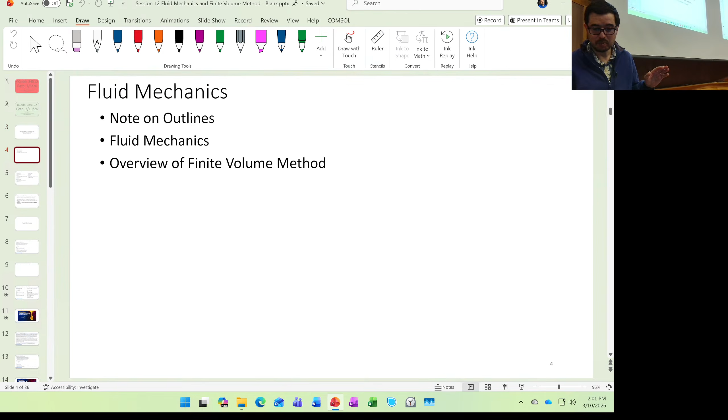So we'll talk a little bit about the projects, the outlines right now. At this point, most everybody is in a group of 3, and there are a few who seem to be looking for group members. I hope they are, I sent them a message today. There was one group of 2. If there are others I don't know about, please send me a message in the Canvas box. I went through the submissions for the pre-proposal and got some information, but I'm not getting all of it. So if you're having issues finding group members, just let me know.

After spring break, we'll have our next checkpoint for the final projects, due the Monday we get back, so I think that's the 23rd or so. That's posted, and that's the first assignment where you'll use the template I posted. Just one of the three of you will put it in your shared folder, and that link should be the same for the rest of the submissions of the semester. It has a lot of sections in it.

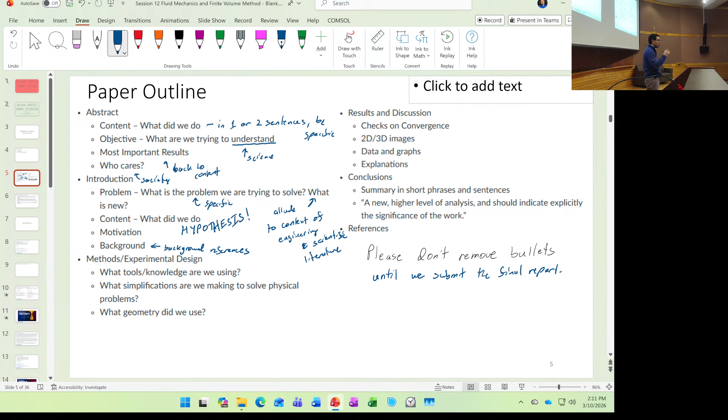There's one thing missing from all these topics in the introduction, and that is the hypothesis. At some point in your introduction, I want you to explicitly state what your hypothesis is. You'll put forth that it depends on, or another way to phrase a hypothesis is if we have, then... In the end, when you conclude and discuss, you're going to suggest whether your data support or reject your hypothesis.

Remember, we can't prove a hypothesis with one study, but we can essentially disprove a hypothesis with one study. We can hope, if it's a good hypothesis, it could be disproved or supported. Ideally you're supporting your hypothesis, but maybe you have an unexpected surprise and you're going to learn something. I'm not going to penalize you if you change your hypothesis as you progress through the semester.

All right, so that's the introduction. The methods or experimental design — you're going to put forth the areas or the tools you're using, or the principles you're using. You can already see in the template I provided that you can add as many sections as you like for the different tools or techniques.

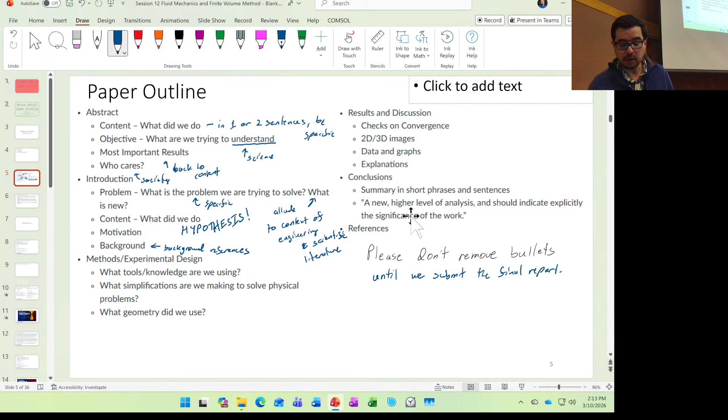And conclusions — you're going to summarize what you have. And then in references, how many references do you think you should have? And what types of references should you have? Maybe that's an easier question.

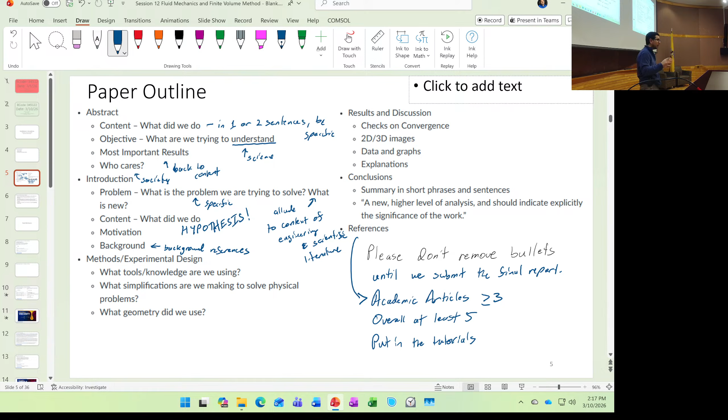Let's talk about fluid mechanics. So what happens when you're walking along and there's a puddle on the ground and you slip? You fall, okay, yes, that's the mechanical response.

Who said that? All right, thank you. Yes, you fall. Okay, what is happening at the interface? So we have the ground, and we have your foot. We'll call this your foot, and your foot has got some velocity. What's in between these two plates? We could say we have a nice little bit of fluid in between them.

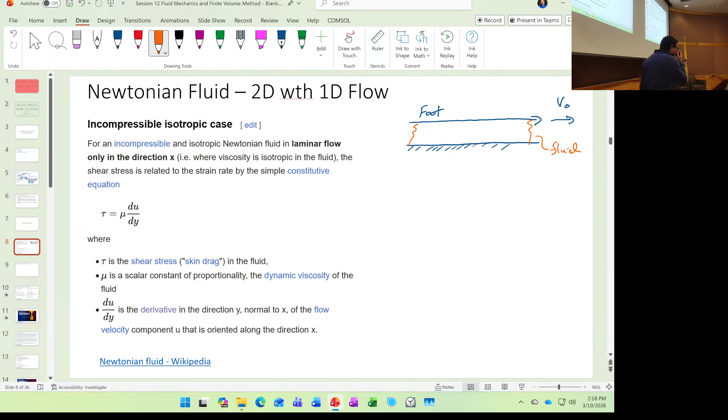What do you say for the boundary condition between the ground and the fluid and the foot or the shoe? What is the boundary condition that you all remember from fluid mechanics? Distance or thickness? No, boundary condition. So this is the boundary condition. So yes, there is, fine, we can say there's a gap. That's fine, there is a gap, we'll call it H. But what is, yes? No slip. No slip. But you just slipped. How is that possible? Boundary layer.

Okay, oh man, well, we're getting right into the jargon. So, well, if there's no slip at the top and no slip at the bottom, what's going on? No slip describes how the fluid acts in contact with the surface. Right at the surfaces, we say no slip to describe the velocity of the fluid. So, and it's not slipping, so what's the velocity of the fluid? So if the foot is slipping at V naught, what is the velocity of the fluid particle right next to the wall up there? Also V naught, right, it's not slipping, right? Okay, good. So if this is ground, the fluid particles right next to the ground are at zero velocity, because they are also not slipping.

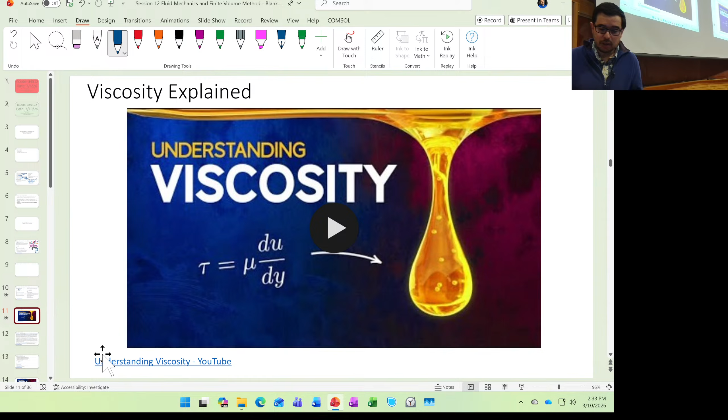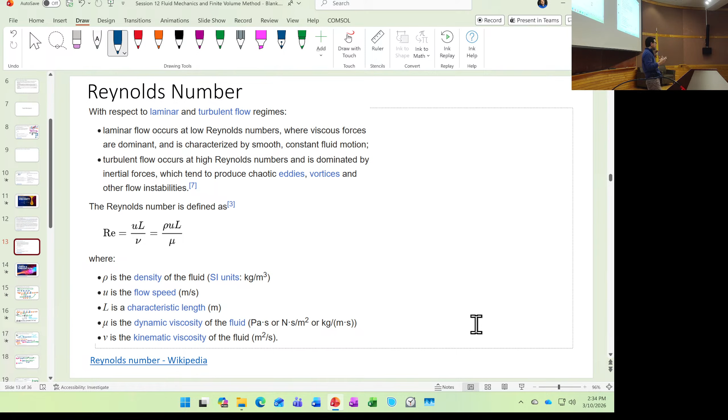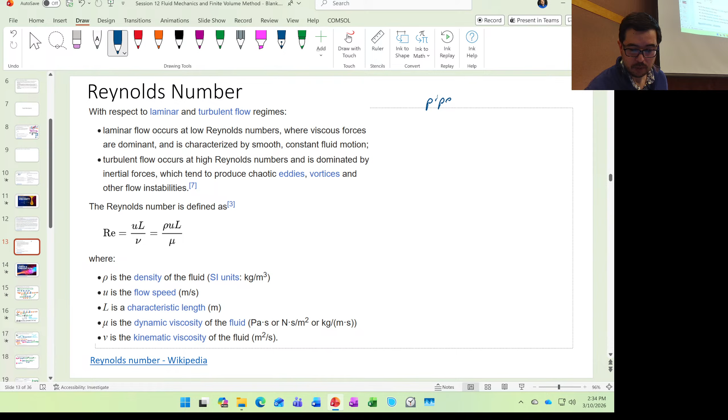Now, for laminar and turbulent flow, what is your go-to number? The Reynolds number. So let's say you have a pipe, going along, with some diameter or radius. This liquid has some viscosity to it, and it's got some type of velocity. What is the Reynolds number here?

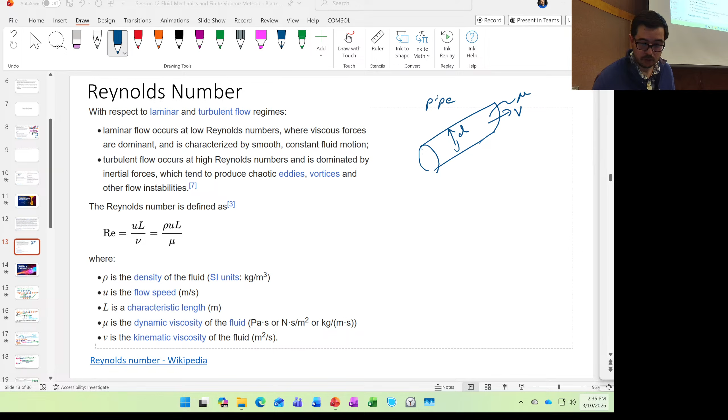Anyone? Okay, quadrant 1, what do you think? I guess I can give it some density too—it's got a viscosity and it's got a density. Okay, now is it complete? Zachary, what do you say? Times the density of the fluid times whatever velocity it's moving at times the length of the...

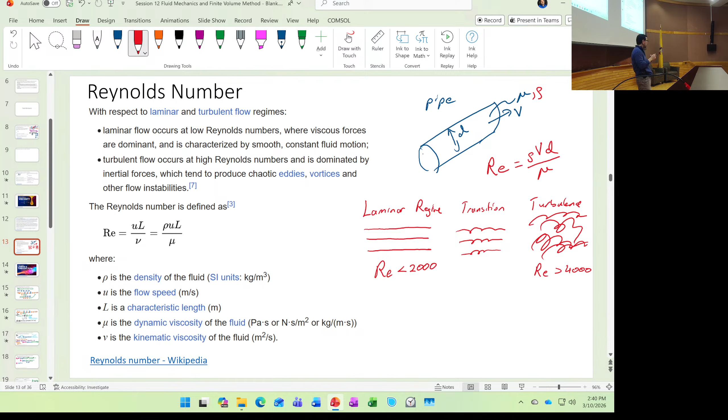One of our seminar speakers recently reminded me that you should tell students: garbage in, garbage out. So we have a couple of phrases in this class. One is baby steps - try the simplest problem you can solve analytically, or where you have ground truth, and then extend it. Two, the experiment always wins - which is kind of sad in a simulation class, but it's true. So if you have experimental data to compare to, that's very nice. And maybe the third one is garbage in, garbage out. Three cliches for your data.

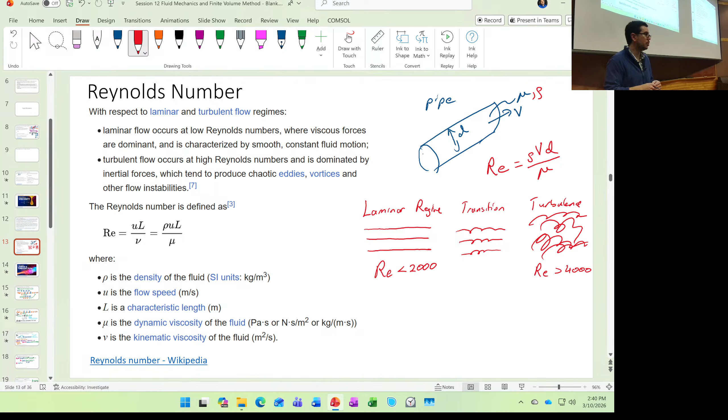So if your model is not very good, or you get boundary conditions wrong, you can get lots of pretty pictures, but you may not be simulating anything meaningful.

For your enjoyment, we're going to review the derivation of the Navier-Stokes equation. But should we just write them all out together? Would that be fun? So much fun - no, we're not going to do that. So you can put your pencils down. I might put you already asleep, but anyway, you can just have this reminiscent, nostalgic feel for the Navier-Stokes equation.

So we start with a velocity field.

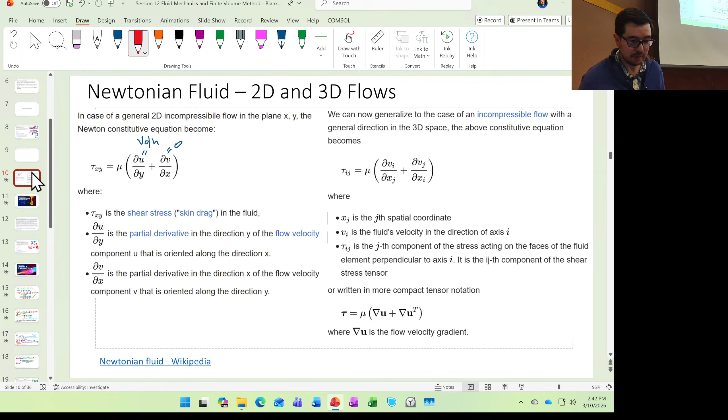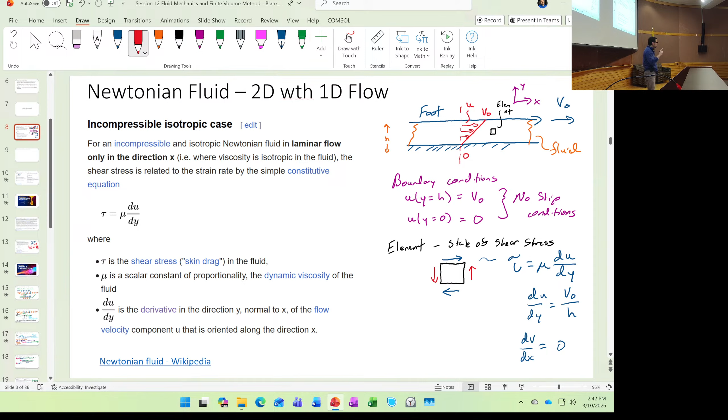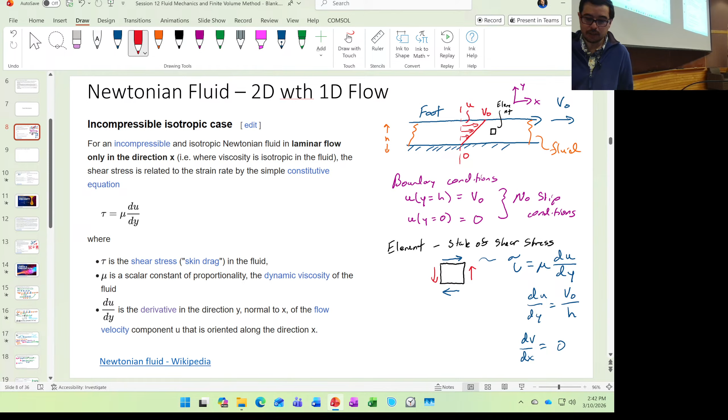Sorry, I made a mistake here. I'll double check, but I'm going to go ahead and put these arrows here - that's still tau x,y and tau y,x. It's still true that dv/dx equals 0, but there's no contribution to the shear stress from the v term. Okay, but let's go ahead - sorry about that, just reminiscing on Navier-Stokes reminded me that I made a mistake.

So here we go. You have a velocity field in Cartesian coordinates, and you have u of x,y,z,t, v of x,y,z,t, and w of x,y,z,t. You can take what we could call a total or material derivative - that's the big Dv/Dt that you see there. Oops, now you don't see it anymore.

What you get is this expression, which looks kind of like a gradient. We had to use the chain rule to break down what's happening with these u's, v's, and w's, since they have a time-dependent component and a spatial component. Using the chain rule like you see here, we can write out this expression - now you have a partial of u, just for the u. You have to do the same thing for v, and the same thing for w.

So we can take this expression and write out what the component for du/dt is here. We end up with this divergence operator, and then we can multiply that against u. For each one of these velocity components - the u, the v, and the w - you're going to have this set of equations. As you remember, in Cartesian coordinates, the Navier-Stokes equations are usually written as three lines.

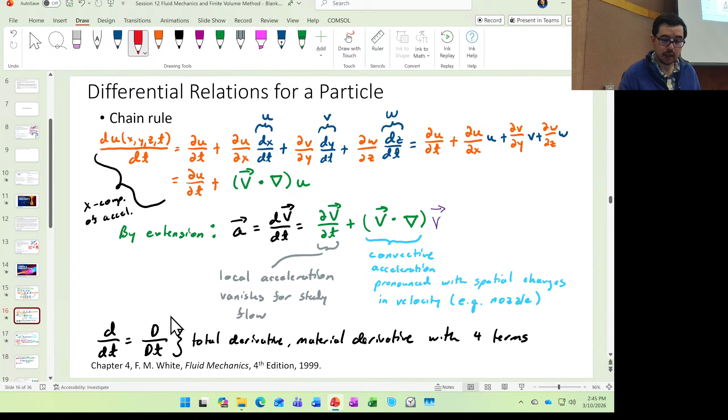Now we've essentially just gone full circle and written this out again. And we can now look at this acceleration term, not just with u, but in terms of the overall v that you have there. As we said, we have this total derivative - those are differential relationships for a particle.

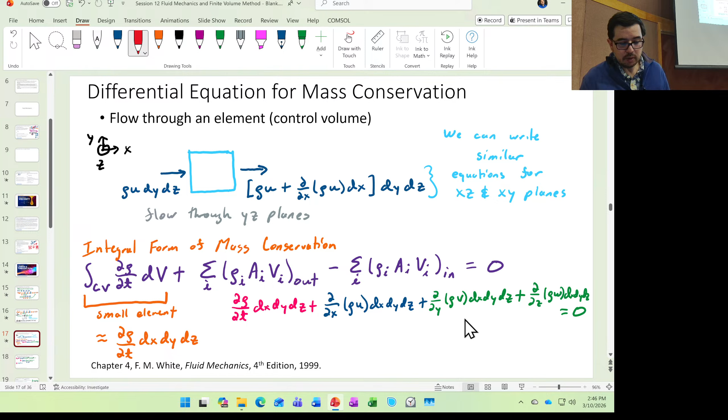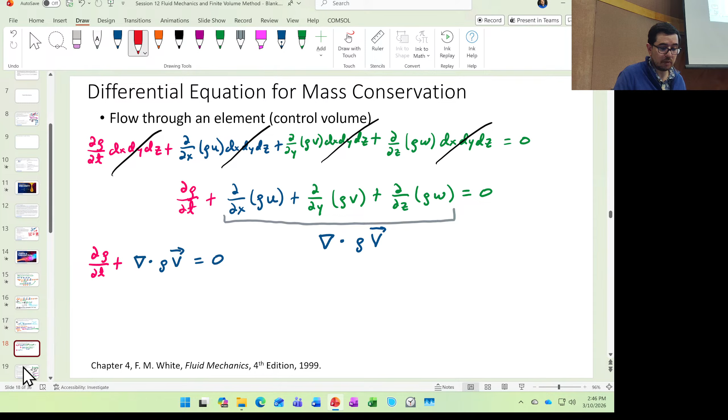Now, when you work this all out, we get this expression, and if the density is not changing as a function of time, we have this divergence of the velocity that has to equal 0. We can factor out the rho, and we're left with the divergence of velocity equal to 0 - that's the continuity, or conservation of mass.

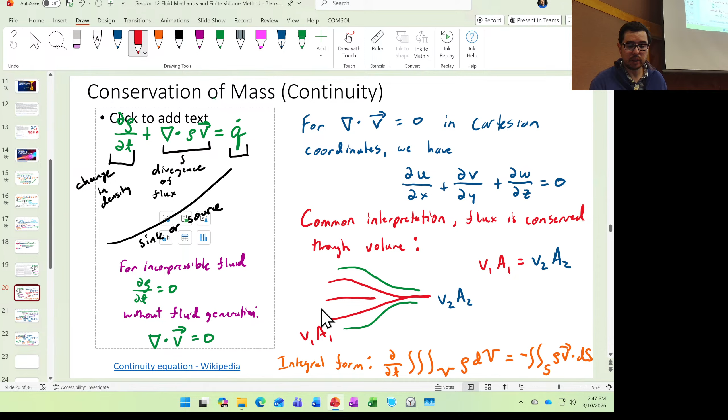Now we can go a little further - remembering that if you have an inlet and an outlet, like a nozzle, with density not changing, you can also say you have conservation of volume. For example, V1A1 on the inlet is going to equal V2A2 on the outlet. Momentum comes into play next, summing the forces on these different sides of this element.

When we do that, we can say there's some stress on this side, some stress on the other side, a difference of dx, a difference of dy on a 2D element. We can say that sigma x times that cross-sectional area is going to be some force, and the sigma x on the other side times that cross-sectional area is going to be some force. There's going to be some type of balance.

Balance in the two forces. We're happy that this is not a solid mechanics problem, because if it were a solid mechanics problem, we'd also have to keep track of the moments. But this is fluid mechanics, so we don't have to do that.

But this is a good illustration of how these shear stresses and these normal stresses are going to be symmetric.

Of note, I should have mentioned this earlier. If you wanted to measure the shear stress of your foot slipping on the floor, and you had a sensor that measured force in the direction you're slipping, that would be one way to approximate the shear stress. Because you've got some area of your foot or shoe, and if you measure the force on that area - the force is actually perpendicular to the vector coming out of that area, but it's essentially sliding along that area - that would be the shear stress.

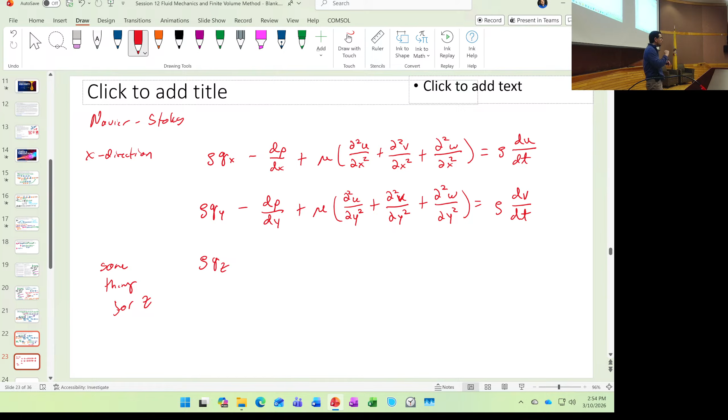And then you would also take a look at your boundary conditions - that's more often the case than initial conditions. So this is where you say, oh, I have no slip on this wall, and that means that's what's going to be occurring. Or I have no velocity in this direction, and so you just go through and cross out the various terms.

Oh man, no one's correcting me, guys. And I am on a good one today.

Okay, so this is going to be... and this is going to be... okay, like that. Okay, that makes everything better. I'm sorry, no one's correcting me and I'm making mistakes. That's not a good comment.

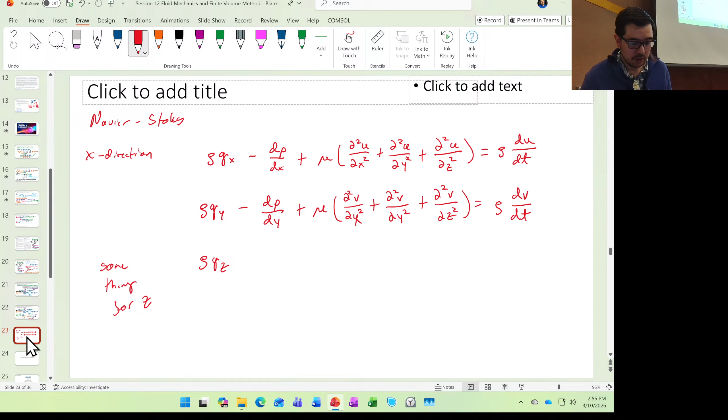We're going to talk about the finite volume method. ANSYS Fluent uses the finite volume method, and many commercial packages use finite volume. You can also talk a little bit about what people say about finite element versus finite volume method, but this is the method happening underneath the hood as you work your problems. It might not be bad to take a little overview of how these methods work.

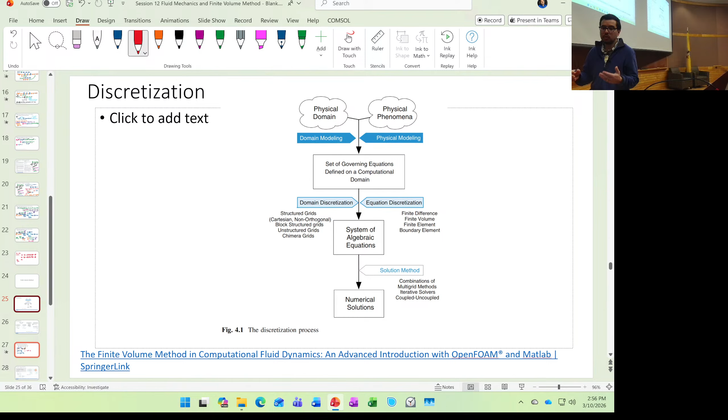So whether we're doing particle dynamics, the heat equation, or fluid flow, we are discretizing the problem in this class - that's one of the main themes. You have a physical domain and phenomena, and we have to come up with a set of governing equations to handle the physics, and then do some discretization.

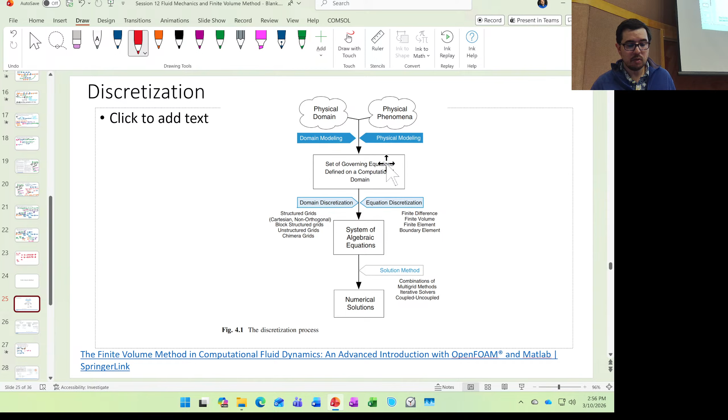In these problems, we're discretizing our geometry and our time. You come up with a system of algebraic equations with the general form Kt equals a forcing function. Then we take the inverse of K times that forcing function to get our column vector for, say, temperature, or whatever values of interest.

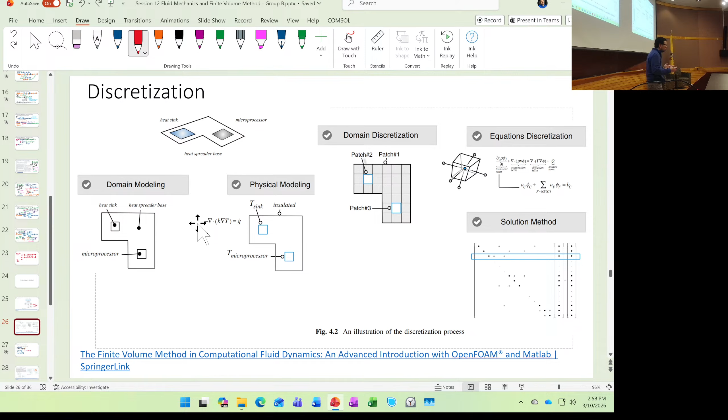So we discretize our domain, we have our equations, and once again we have Kt equals f, and we're trying to figure out the result. In the steady state situation, we were using Q before, and in this case Q dot - Q dot or Q, it's not the greatest, but they're interchangeable. We're going to look at how we map this method to the heat equation. Remember, we've already done this with finite difference and with finite element. Now we're going to use the finite volume method.

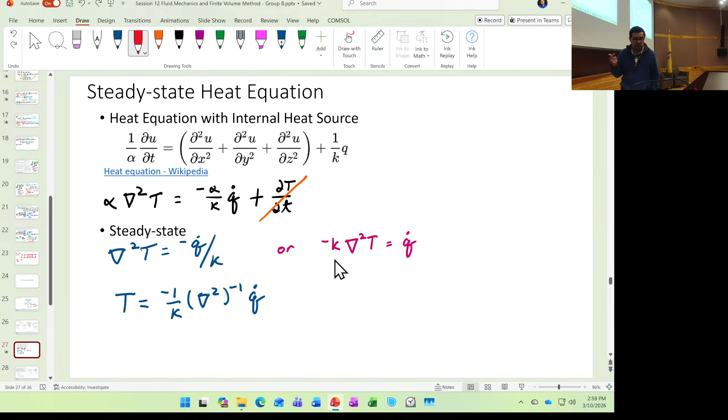Okay, so the equation that we care about is the heat equation. Today we're going to use Q dot to be consistent with what we have here. In the past, we just used Q.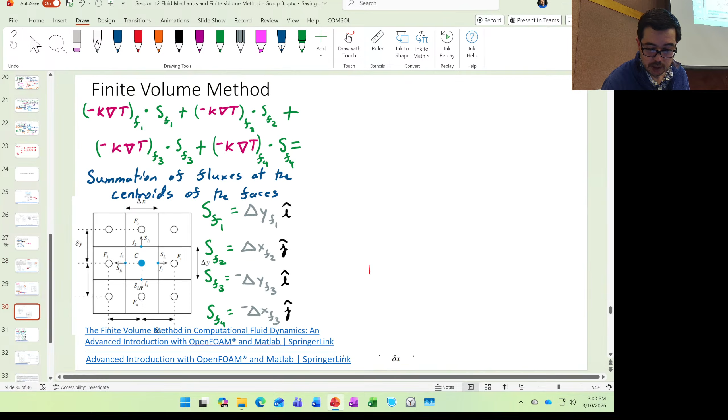We can think of it as having a control volume, and write it in this form with the physics. And we can also integrate the other side. So all we did is we took this equation for the physics, the heat equation, and we've integrated both sides.

Now we can then use the divergence theorem on the left side. The divergence theorem says we can take this volume integral of a gradient and change it into a surface integral. So what it ends up looking like is this relationship. On the right side, we just take the integral - it's a volume integral on this small element, dV. This just ends up being the heat flux in that element, and that control volume, times the volume of that element.

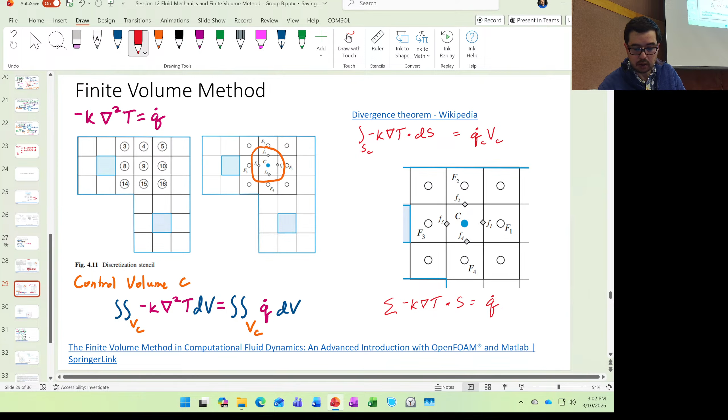And then we take the surface integral, and we discretize this so that it's really just a summation of these k gradient T's times the surface area. What we're talking about is for this element number 9, which is right here, now named element C, we're going to be looking at how volume, or liquid, or heat is flowing into or out of this element.

Where can it flow to, or what can it flow through? It flows through the wall. So what it doesn't flow to in this form, it doesn't flow to this element over here. It doesn't go through this corner, this corner, this corner, or this corner.

I mean, it does ultimately communicate, because if you start here, then there's flux through these walls. But the way that this finite volume method works, it only goes through neighboring surfaces. So these surrounding surfaces are going to be lowercase f1, lowercase f2, lowercase f3, and lowercase f4.

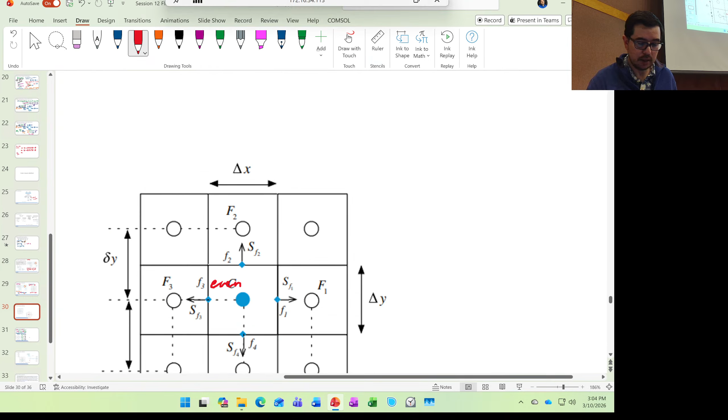Now, what does that look like? It looks a little bit ugly, but not too bad. All right, first let's think about what the areas of these are.

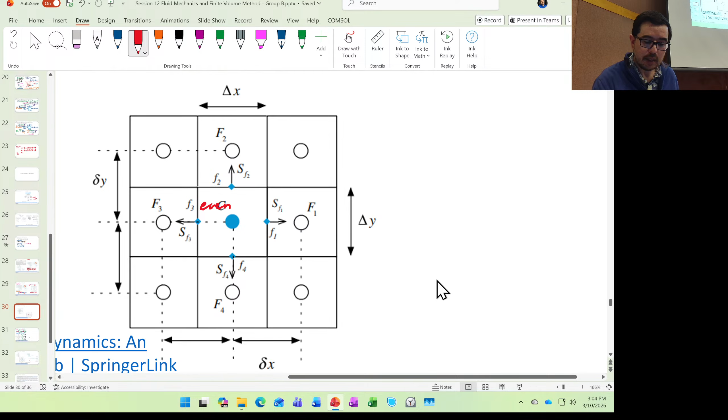So you see that there's this S sub F1, there's this S sub F2, there's this S sub F3. So we can say that this S F1 can be thought of as this length.

And yes, this is kind of a 2D problem. It is a 2D problem. So it would have some depth, but we're going to ignore that, and we're just going to say that this area is going to be this distance.

So we could write that as, what is the delta y on this face 1? So that's this lowercase like that. And we can assign a vector to it. We've done this before, and so it's going to be in the I hat direction.

S subscript F2 is going to have a delta x, that's the area that we have here. So this is going to be a delta x on face 2. And this is going to be in the y direction, the vertical direction.

SF3, you can get how this is going. It's going in the negative direction, this vector is. And so it's going to be minus the delta y on that third face, in the I direction. And SF4 is going to be in the minus Y direction. Okay, so those are the surfaces.

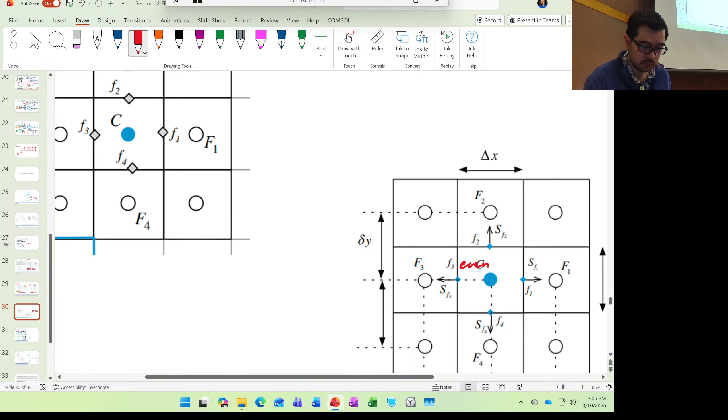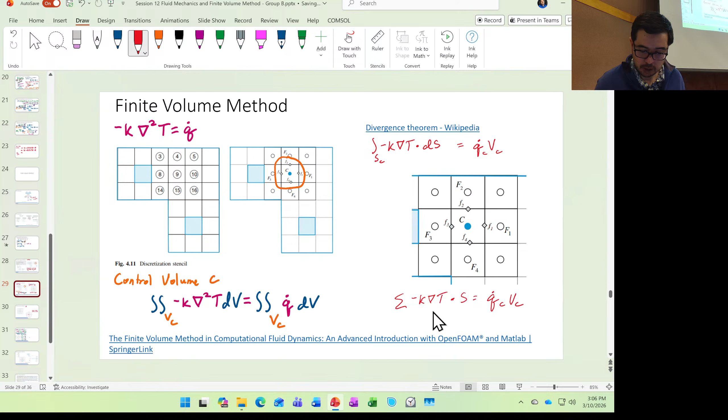As a reminder, the equation that we're trying to solve is going to be this one right here. This has the form of - this comes from the divergence theorem and discretization of the divergence theorem. And now we'll attach some indices. So this is going to be on faces 1 through 4, this is on each face, and this is that SF.

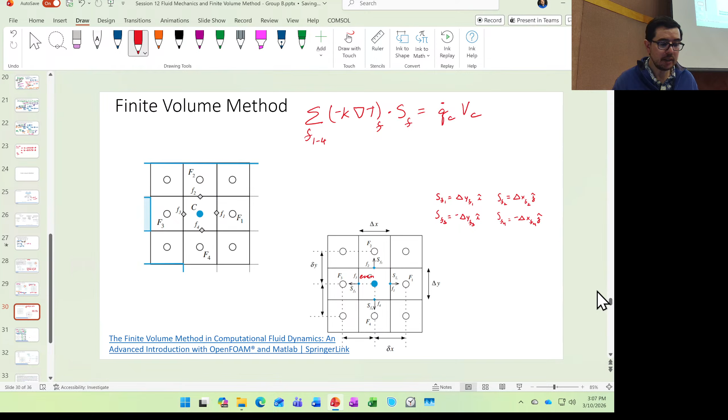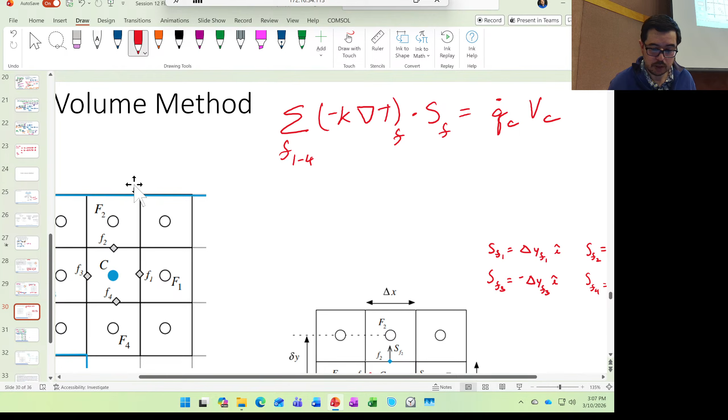So what we actually can do with this equation, now that we know what these SFs are, is we can say that the Riemann sum on these 4 surfaces is going to be the following. It's the physics - it'd be nice to have this.

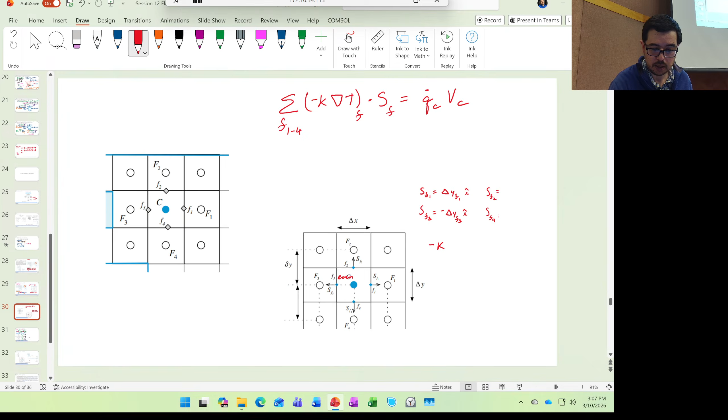Yes, it's minus k times the gradient of the temperature on this first face, dotted with SF1, plus minus k gradient of temperature on surface 2, the second face, times the second surface area, plus minus k del T on the third face, times SF3, plus minus k times over the fourth one, and this whole thing has to be equal to this q dot CVC. So it's kind of like conservation of volume, although it's more like conservation of physics going through surfaces.

How do you represent this gradient of temperature in a discretized world? What do you think? If we're discretizing a gradient, and it happens to be a gradient in a single direction, and it's discretized, what does it remind you of? How did we discretize derivatives a long time ago? We use finite difference.

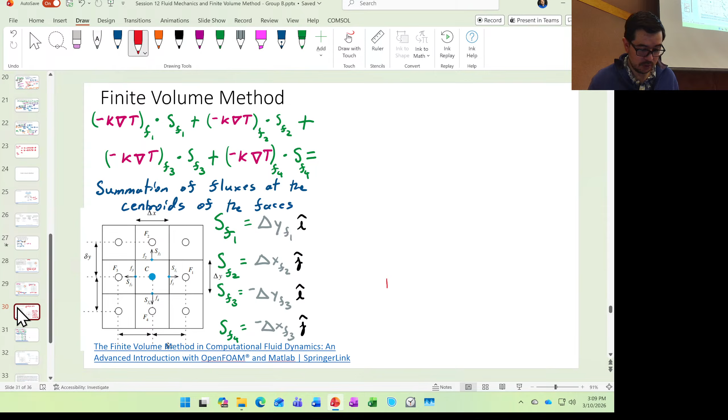So what we can do is we can say that a discretized form of del T would be to essentially make sure that we remember that this is essentially dT dx or dT dy, because it's going to be just in either the x direction or the y direction. And we can say that we now have, as an example, the ability to look at a difference in temperature over a difference distance.

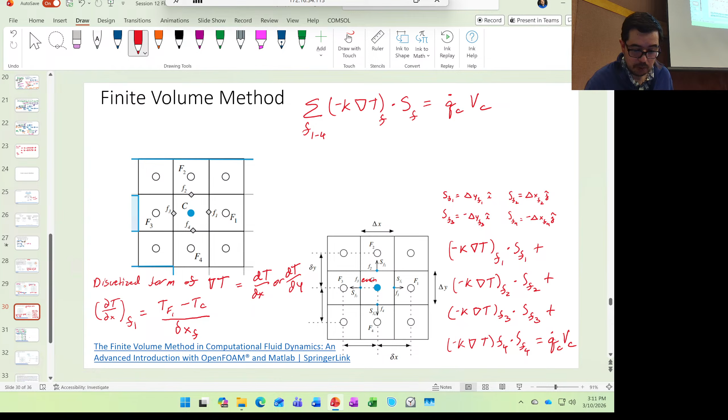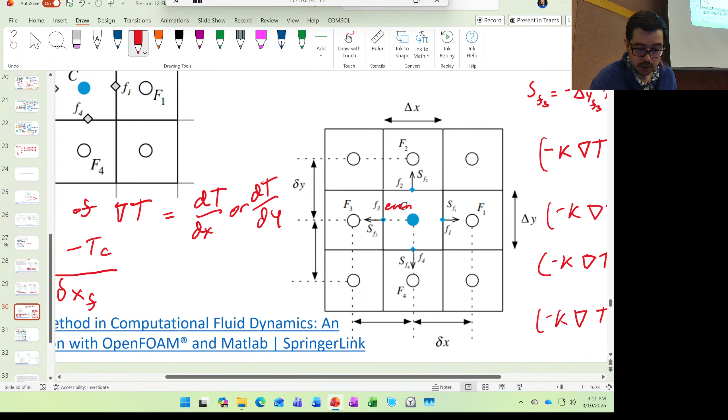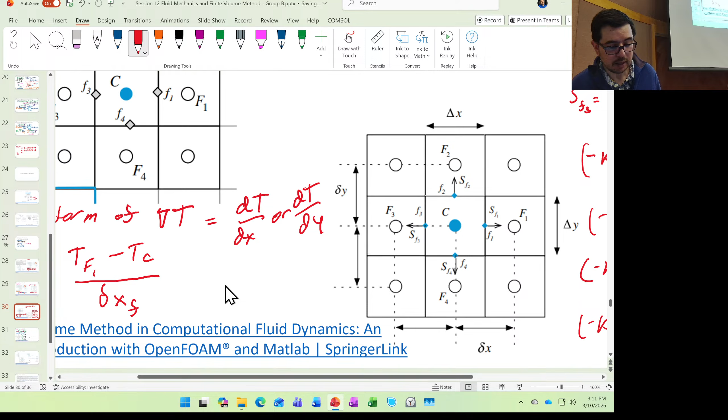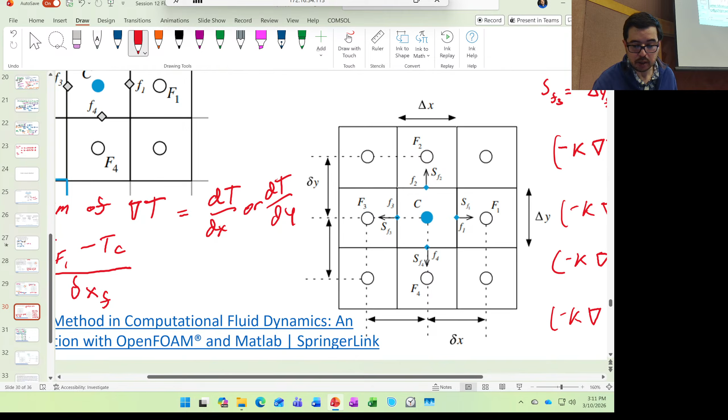So in this particular case, on face 1 over here, what we're doing is we're saying, what's the temperature at the centroid of this neighboring element? What's the temperature at C, the centroid of the current element? So that's TF1 minus TC. And what's the difference in the distance? Over what distance is that happening? And that's how we say the gradient of temperature can be represented as this finite difference. And that's what we plug into this set of equations.

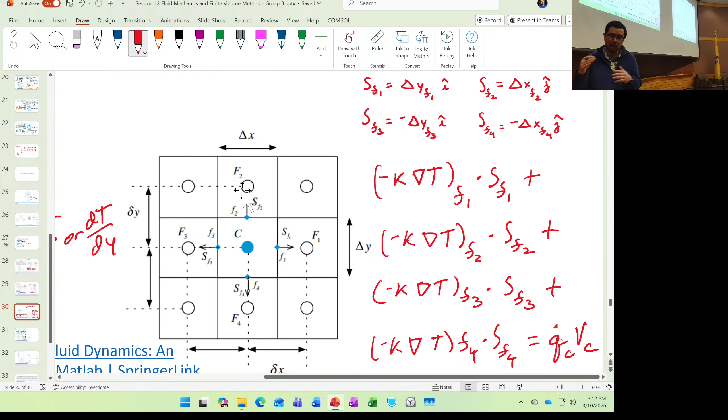You would continue this on all the other faces, and you set up essentially a number of systems of equations. This would be one row of your K matrix for this element in the whole model. Then if you go to this element, say F2, you have another row in your K matrix.

Each one of these is going to be a separate row in your matrices. In the end, you're going to have the computer solve the problem of inverting this K matrix, and you'll be able to figure out the distribution of temperature. That is how the finite volume method works.

If you had to choose to do the math for the finite element model or the finite volume model, which do you think has a simpler set of mathematical steps to get a K matrix? Do you remember? What did we have to do in the finite element method?

Well, we had to get a K matrix. We had to create these trial and test functions, these basis functions. We had to use the Galerkin method. We had a weak form. We had strong statements, and then we had weak statements. It's extremely complicated to do finite element. It's more complicated to do finite element.

This method is actually pretty straightforward. Now, there are some tricks we don't talk about in terms of how you solve this K matrix, or how you invert it efficiently. But what the computer essentially has to do is discretize, so it keeps changing the size of the K matrix, because if you can get away with enough accuracy using few elements, then you have a certain K matrix.

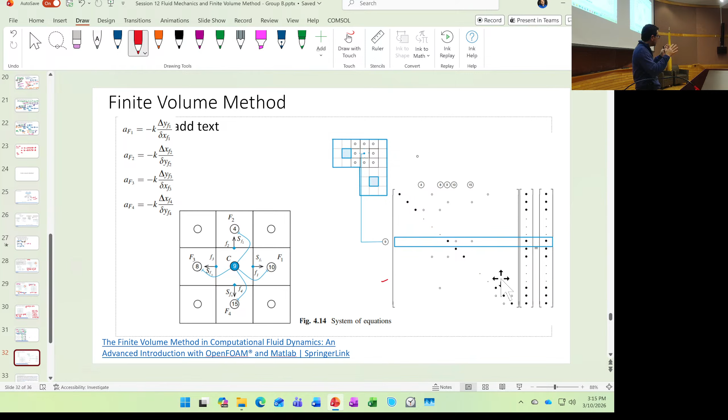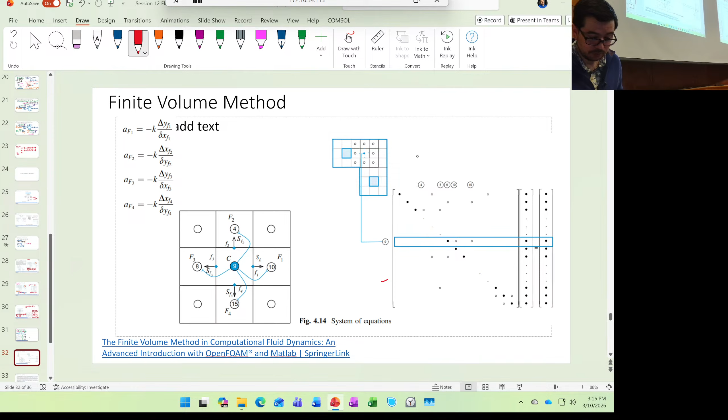Here's just a bit on the finite volume method. It uses surface integrals, uses the divergence theorem, which we talked about. It looks at flux, it looks at conservation of flux, and the finite volume bit refers to the small volume surrounding each node point on a mesh. So you're still using meshes, and you're looking at these very small volumes.

We could have called it finite element, but that would have been confusing. Or vice versa, they could have been flipped, but that's just how they've been named.

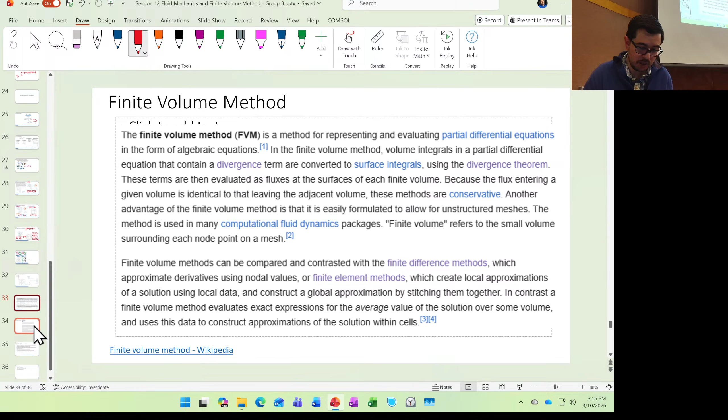As we've discussed, for CFD, ANSYS uses the finite volume method. COMSOL does not, COMSOL uses the finite element method. If you read these blogs and various things, they will say anything you can do in finite volume method, I can do in finite element method.

They are very heavily committed to the finite element method, COMSOL is. And ANSYS, what do they do? They buy a company that does something well, and they put it in their packages. And then we get to figure out how to make them all work together.

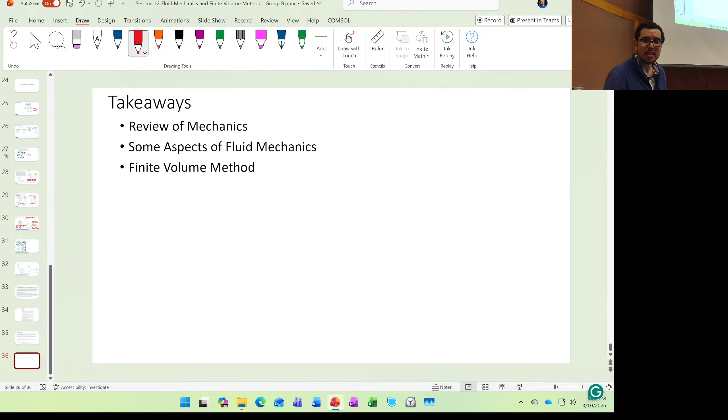So today we reviewed some mechanics. We actually reviewed how to do outlines, paper outlines. We discussed some aspects of fluid mechanics, and then we discussed the finite volume method.

And you'll get to use ANSYS Fluent and have your first experiences with the finite volume method. At least when you go in for an interview, you can say, yeah, I use Fluent, and we could use the finite volume method, instead of saying, oh yeah, I use Fluent, I use the finite element method. You'll know that it's actually not that.